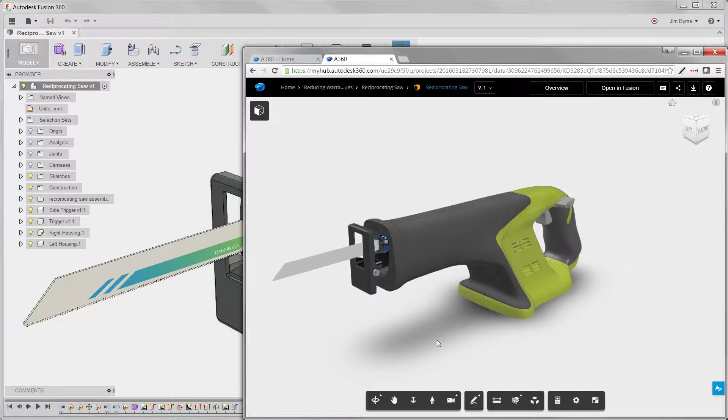In this example, the engineering team has been challenged with increasing the life of the blades and other components in this reciprocating saw, as well as maintaining customer satisfaction. With moving components, there is always a concern for excessive vibration. This initiative will ultimately reduce warranty issues for the replacement parts, or in some cases, the entire product.

Collaboration is paramount to making proper design decisions and getting the product to manufacturing on time. Other team members can benefit with the ability to view, mark up, and communicate their ideas from any location in a web interface.

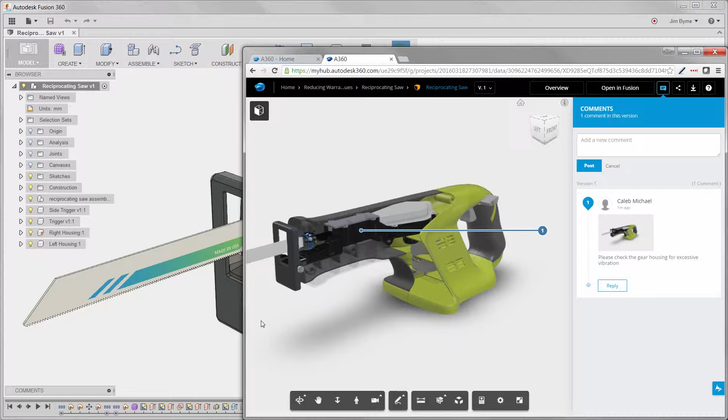Designers can then reply to others and take action on comments right in the design environment. And all communication is saved within the file for future use. No more sifting through email to find notes on a project.

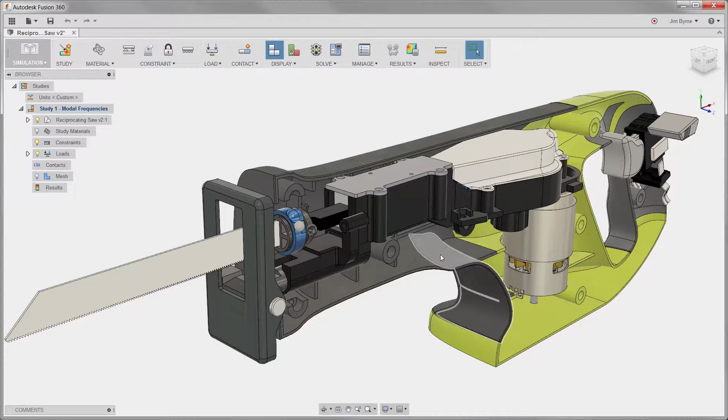In this case, we will analyze the possibility that the internal components may shake too much using a frequency study. The only components we are interested in are the gear housing and the two gear covers.

Now let's begin by describing how the parts are held down. There are a few holes in the back where the motor is fastened. The motor is fairly snug in the outer housing or the body of the saw. Then we will also add the same type of pin constraint here where the flange is attached to the body as well.

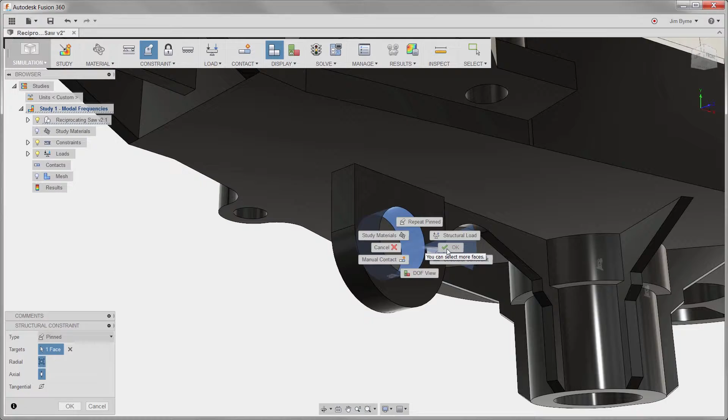There is even the ability to observe part color for determining whether the components are held down properly and avoid free body motion. We can see the two covers shown in red are free to move. Contact conditions between these parts can be applied automatically, saving the time it would take to normally select the faces.

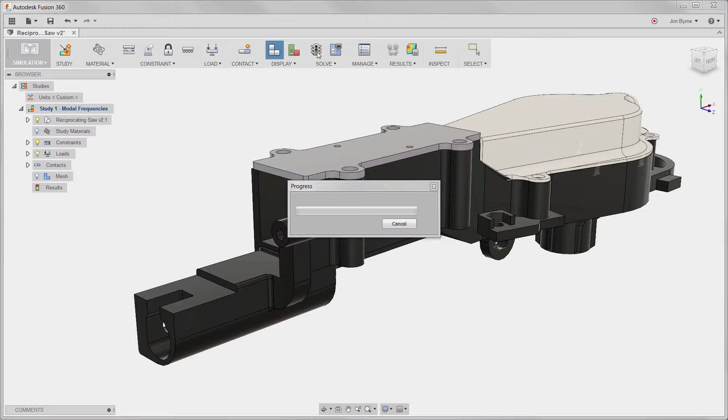Let's use plastic tabs on the outer housing to suppress the motion perpendicular to the selected faces, and run the solver again.

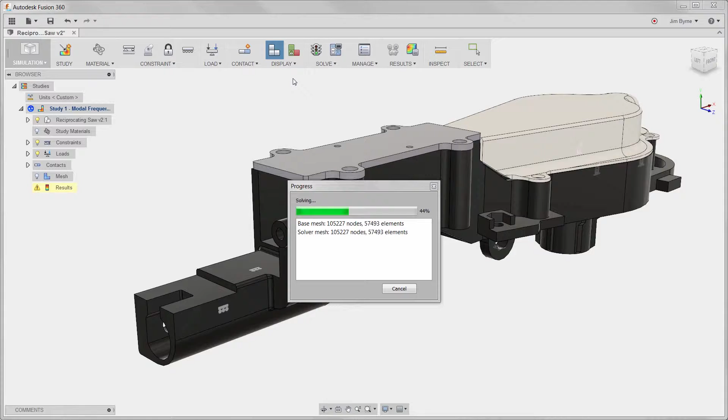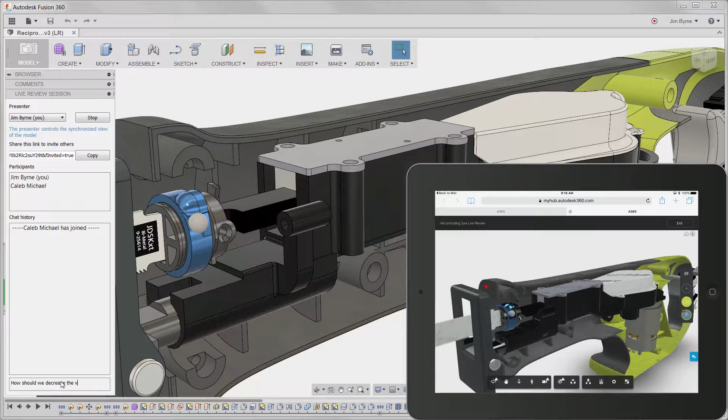As mentioned earlier, collaboration with other team members will help to get the job done quickly. Let's take a look at a live review between the designer and engineering manager. This level of communication is unmatched with the ability to chat and even observe the changes being made to the design during the live review session.

Gain insight from others who are working on the project or the customer using anything from a desktop computer to a mobile device. Discuss ideas and find out if they will work without reserving a conference room or the need for online meeting applications.

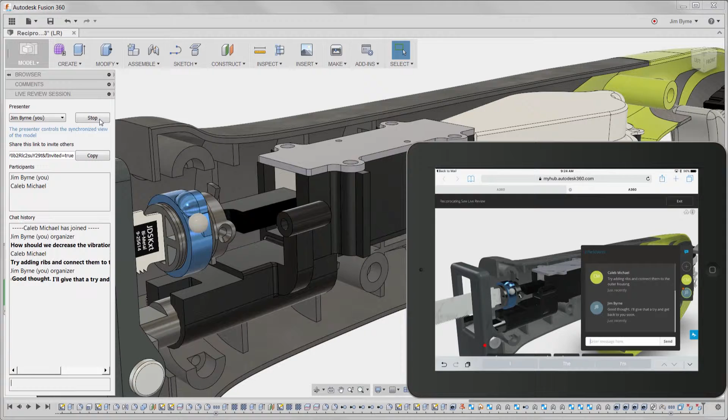In this case, we have a plan to create ribs and connect them to the outer housing. Now the moment of truth. Let's test it using the study we have been working on. From here, we can simulate the connection between the two components.

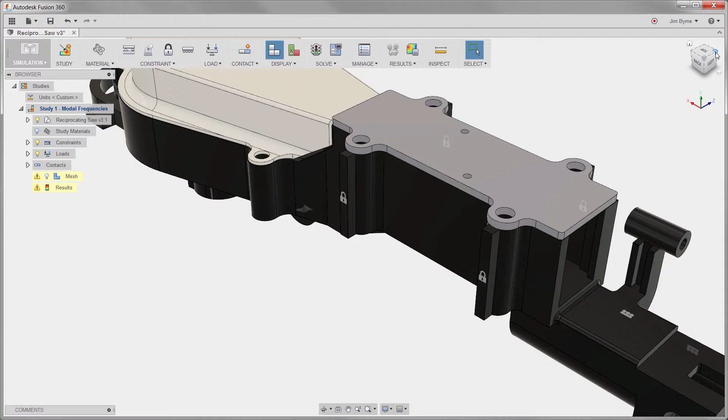The first question is whether the design is going to improve our frequency results. Secondly, we also want to consider the additional cost in manufacturing when modifying the design. Connect the dots and ensure we are making proper design decisions. We can do this by measuring the impact of the change. Do the results meet our engineering criteria?

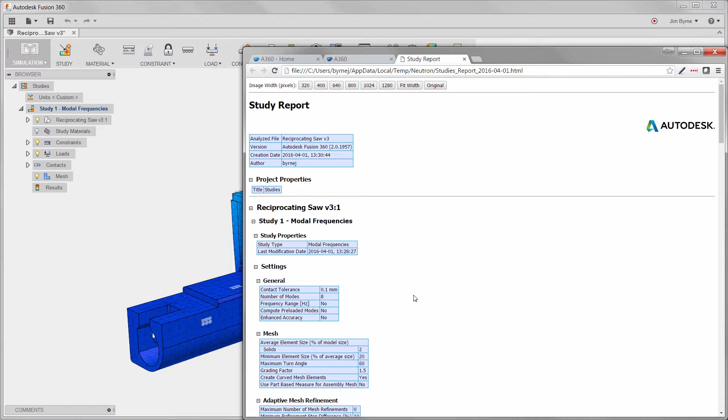After running the solver, it looks like we have reached our goal of close to 1000 Hz. We have significantly reduced the vibration on the gear housing, which in turn will reduce warranty issues on the product and increase customer satisfaction.

As you can see here, a report can be created automatically displaying the setup and the results for the analysis. This includes frequency levels for mode shapes as well as mass participation factor. It can then be saved and sent to anyone for review.

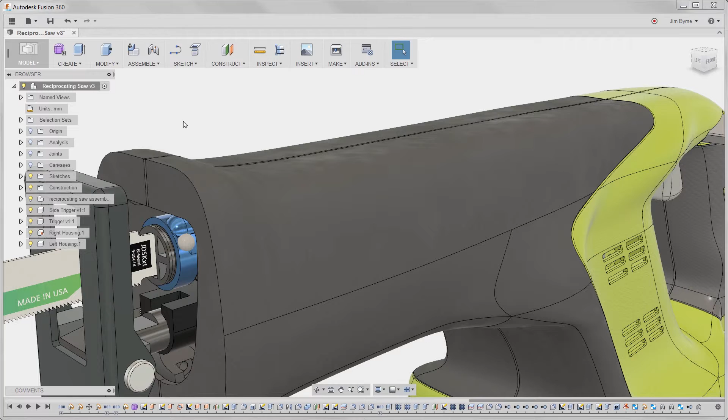Autodesk Fusion 360 is more than a 3D modeling tool. Test your designs beyond linear static loading conditions, and collaborate with other team members or customers live and get the job done faster. There is no better way to ensure a quality design that satisfies engineering criteria and customer needs. Fusion 360 is your trusted solution. It is the future of making things.